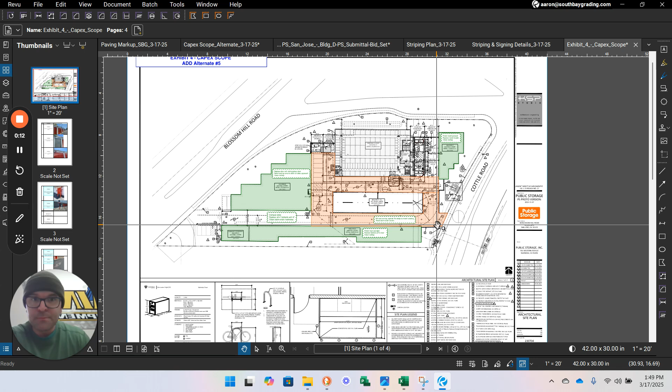Here we have an exhibit that Tilton Pacific sent me of the Blossom Hill Public Storage Project in San Jose. This storage facility burnt down, this one partially. All this orange color is asphalt driveway, and these other green buildings weren't touched by the fire. They asked for a site assessment, and basically they're going to demo all this asphalt right here. They wanted to know how much of this asphalt is salvageable and can be slurry sealed.

So I went out there and took a bunch of pictures. It's pretty cracked up. So I got my measurements, and then I put together an exhibit, which is here.

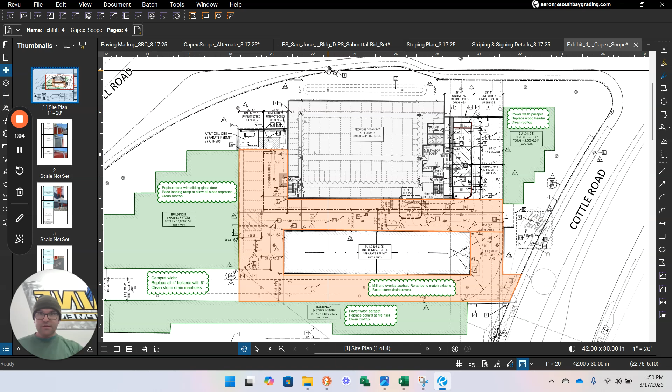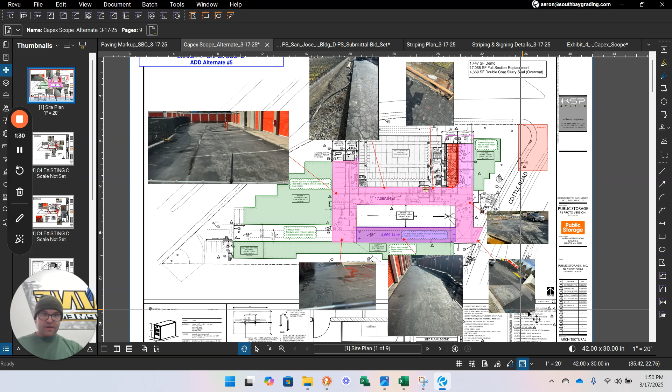So here we have the same exact exhibit that I used our handy dandy snipping tool to drop photos of what certain areas look like into Bluebeam, so I can walk their project manager through. For example, let's go look at this area right here.

See how alligator cracked this is? All that, you try to slurry seal that, it's just going to come back up after about a year. So I'm recommending we demolish all this asphalt. I basically walked the loop through here, and if you look over here, it's nice and smooth. You can slurry this.

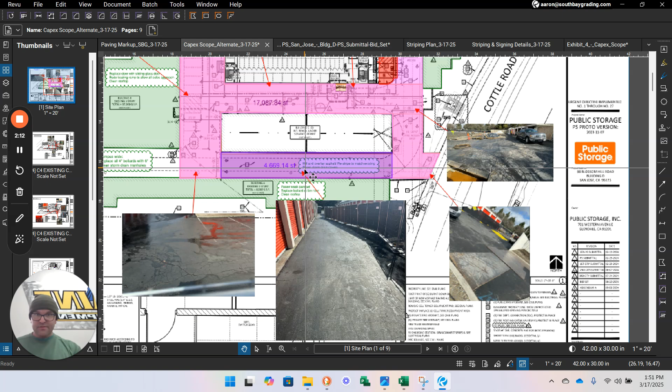Basically, all this pink color that I highlighted and measured, about 17,000 square feet, is going to be full replacement, a full section replacement. This dark purple is slurry seal. So I'm saying yeah, you can salvage this asphalt, but this asphalt you cannot salvage. And then the red is just straight demo. They're putting concrete parking stalls in here, and this little slot right here is a valley gutter for stormwater flow.

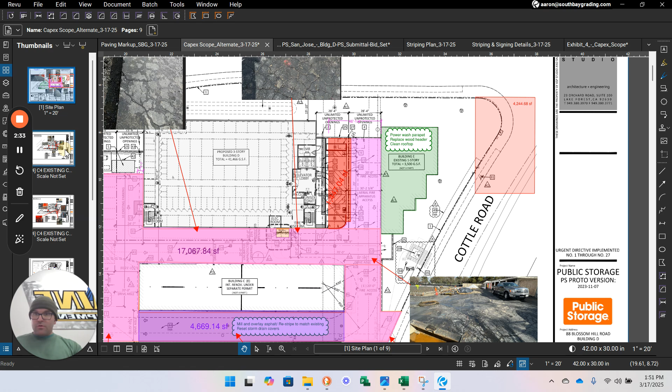So, page 2 of the exhibit, let me go back to this. So just this little snipping tool is pretty amazing.

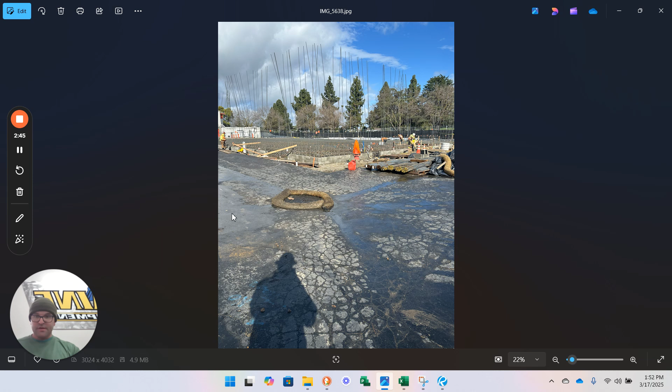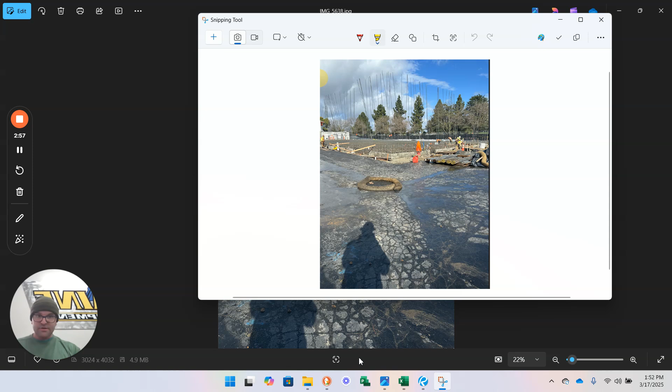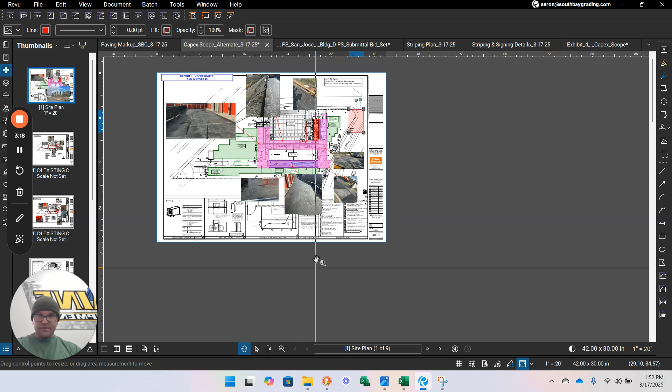If you don't know how to use it, the Windows button and S will pull up snipping tool. You hit the plus button here, and it's basically a screenshot. You take a screenshot, Windows automatically copies it, then you flip over to your PDF and hit Control V. I gotta click on the page first, Control V, and there you go, your photo's in there, and you can shrink it down to size, plop it in wherever you want. I already have this photo in there, so that's essentially what I did with all these.

And I drew an arrow pointing to where this picture is on the plan. Over here, where they want us to hydrojet all the storm drain inlets. So I went around and counted them.

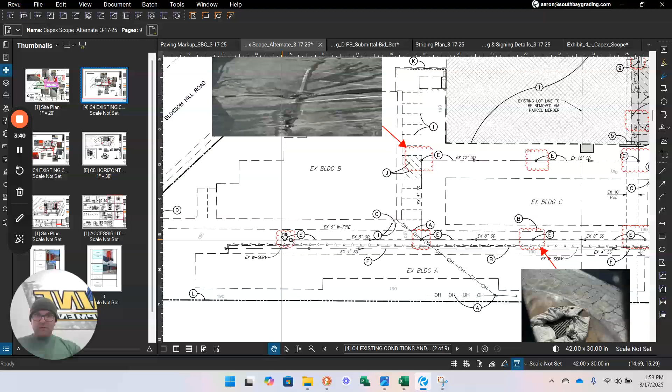Using the Rev Cloud function, that's just tapping C on your keyboard. So if I tap C and draw a box, boom, Rev Cloud, there you go. Same thing with A for arrow. So I can stretch that out, there's the arrow, you can see.

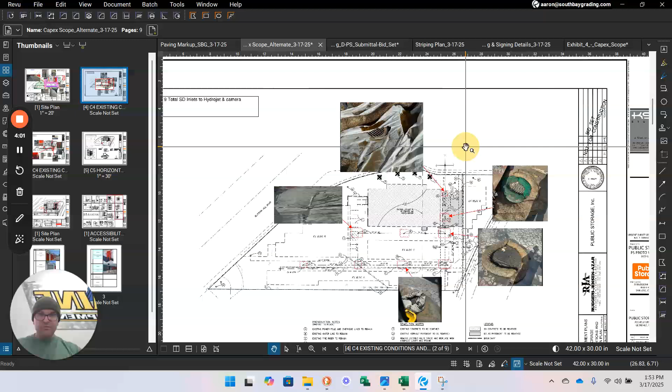So a bunch of storm drains, we're gonna blast out with water and scope them with a camera to make sure they're all cleaned out.

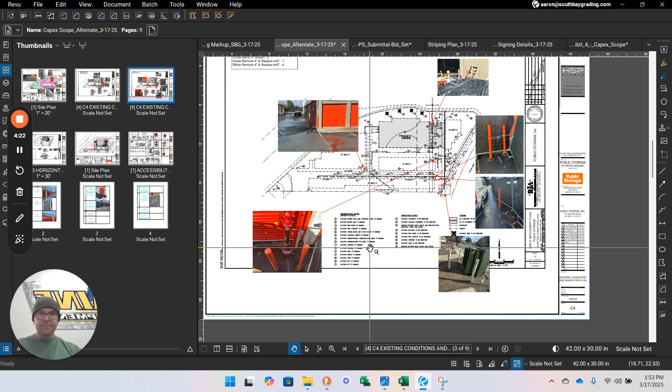Next step is here, bollards, existing bollards. So bollard, if you don't know, is a steel post filled with concrete, embedded into a concrete footing. Let's go here. Looks like this cross-sectionally, so you got a concrete footing here, big post slammed in there, and then you fill it with concrete.

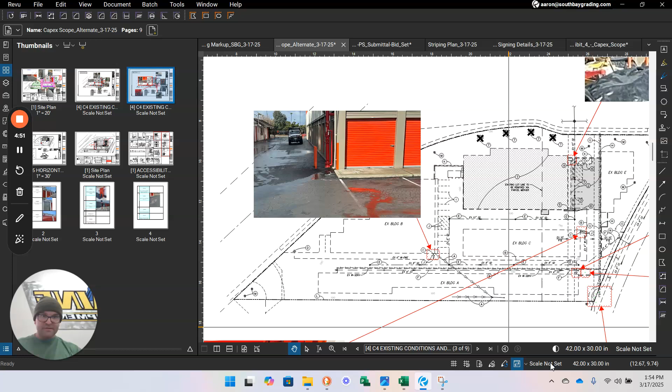So they've got a bunch of bollards on site. They want any 4-inch bollard to be removed and replaced and beefed up to a 6-inch. So I went around, took photos of all the bollards. Basically this is like a CYA document. I'm saying, okay, here's all the 4-inch bollards that I found on site. Please let me know you want me to take these out and replace them.

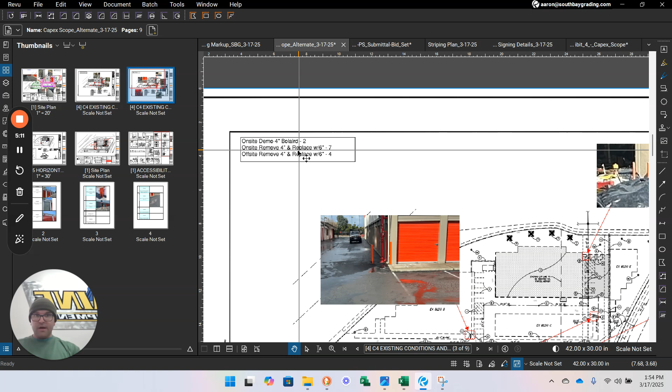So later on, if they want to throw in extras, I'm like, hey man, this was our line in the sand, and this is what we gave you a price on. So if you want to add more, by all means, but that means more dollars.

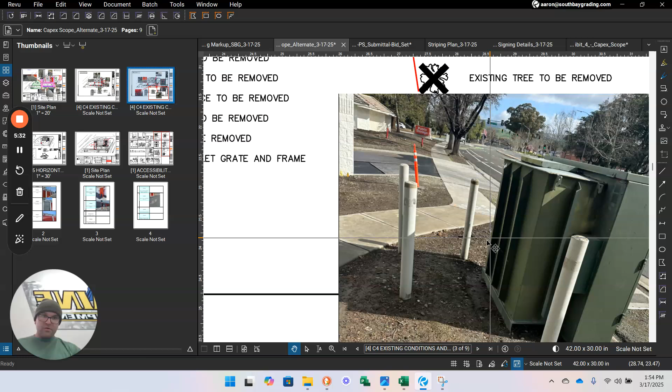So here's the site assessment of the existing bollards. There were 4 on the offsite, which is outside of the property line, so that's public right of way. I saw these bollards outside the property and thought, well, might as well take a picture of that and show him where they are and ask if they want those replaced as well, because why not?

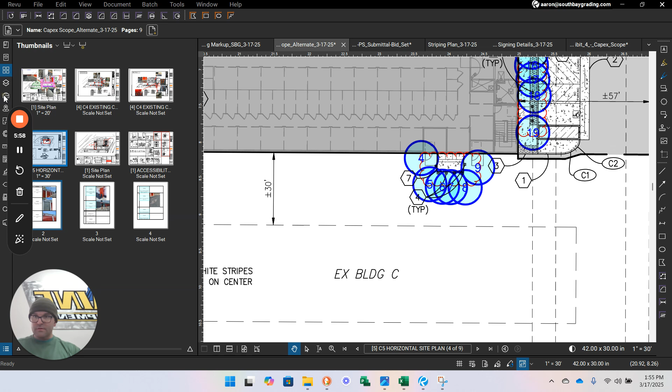And then we have a bunch of new bollards going in. So I used the count tool, if I can get to it. The Loom thing's in the way. Yeah, well, there we go.

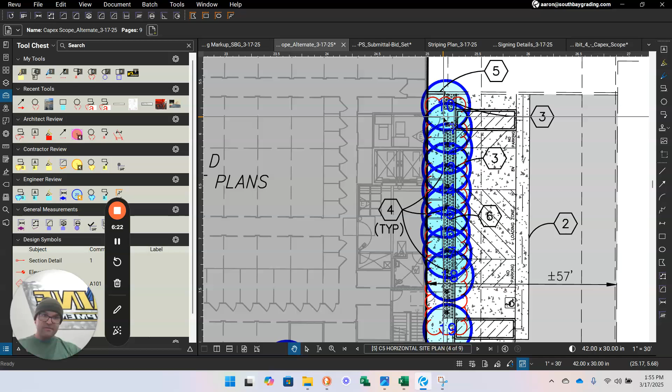So over here, if you go to the toolbox and hit this little thing right here, every time I click, this thing counts. So see how it's at 20, that's because I already counted 1, 2, 3 new bollards here, 4 through 9, and then 10 through 19. This right here is the actual bollard. So 19 new bollards, so I made a sheet for that.

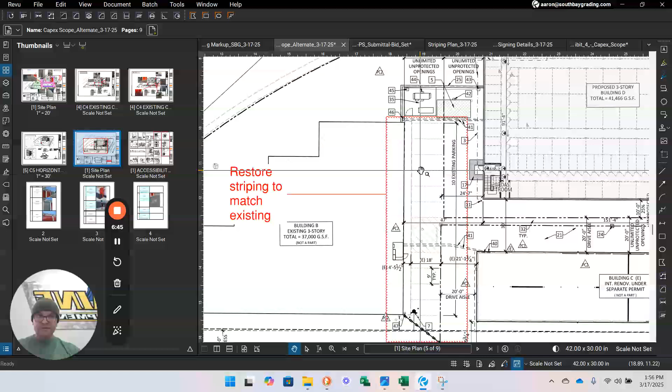And then what else we got? Oh, striping. So after we do the asphalt, you've got a big blacktop with no parking stalls, so you have to stripe it. So they want to restore the existing striping that was out there. So this is going to go to my striper, and he's basically going to put back what they had.

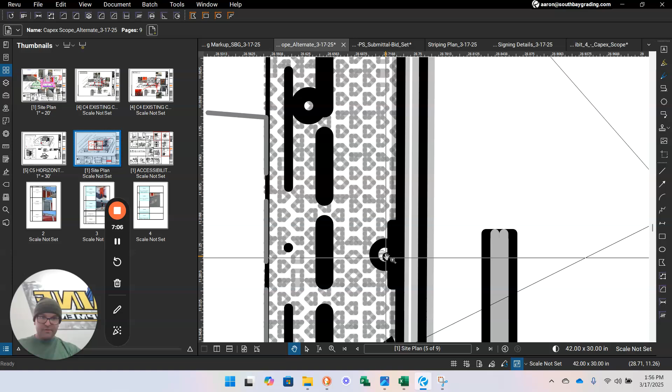And then over here, they've got new parking stalls. So this, you've got an EV parking stall, an ADA parking stall with a little ADA sign, and then wheel stops. So I sent him this sheet, and then I went and found the details that show the layout. He kind of knows what to do, but it's best to be as thorough as possible.

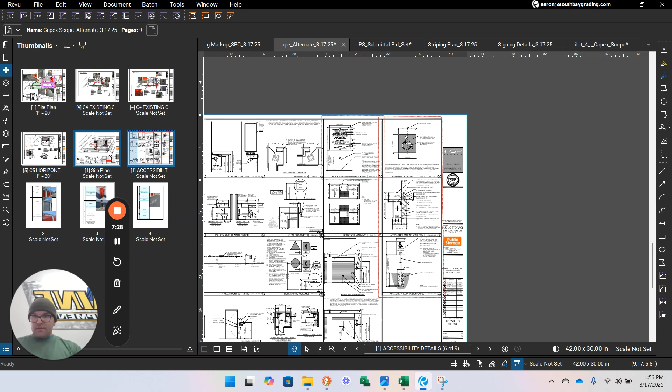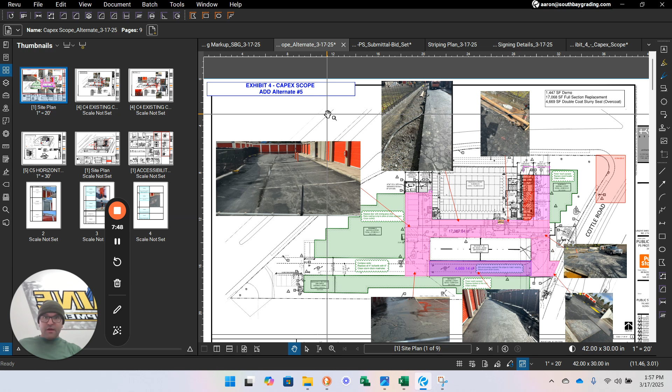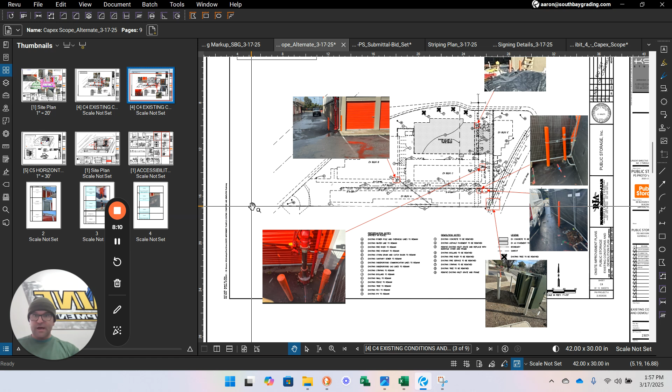So this was just a quick overview on the usefulness of Bluebeam in everyday construction office work, where you can get your idea across, communicate how you see the scope of work looking, and then send it over, have them verify it, and then put a number to it. So I like sending all the information at once and not having 100 emails going back and forth, because that's hard to track later on.